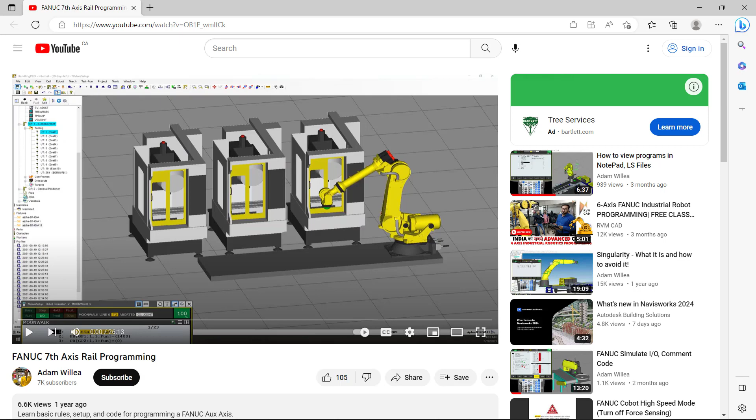In this video, I'm going to show you how to configure an extended axis in RoboGuide. There is an excellent video from Adam Willea on YouTube that explains how to configure a 7th axis on a rail. In this video, I'm going to do a similar configuration, but in a slightly different way.

We're going to start by creating a new project on RoboGuide. We're going to start from scratch. So if we're going to create a new cell, we can select new cell from this screen, or we can go to File on the menu and select new cell, or select View and Navigator. When we open the process navigator, we just select start a new cell.

And the wizard is going to pop up. On the wizard, because we started from RoboGuide, I'm going to select HandlingPRO. I'm going to select next. It's going to show the name; the default is HandlingPRO1. We're going to go with that. Select next. Here, from these options, we are going to select create a new robot with the default HandlingPRO configuration.

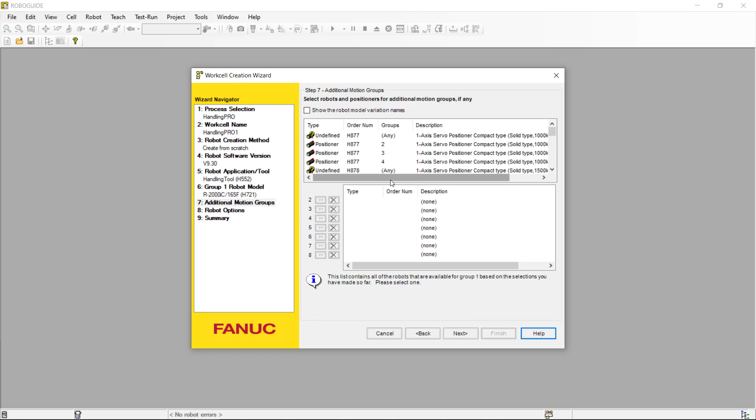We select next. In here, I have the versions already installed for RoboGuide 9.4 and 9.3. I'm going to select version 9.3. I select next. This option is asking for the end-of-arm tooling. I'm not going to select any end-of-arm tooling for the moment. I select next. And on this screen, the default is the robot R-2000iC/165F. I select next. On this screen it's asking for the motion groups. I'm not going to do any selection. I just press next.

And in here, we're going to select the options. To look for the options, we can just click on the search field and type the options that we want. I'm going to type constant path, and I'm going to select the option R663. And next, we are going to select extended axis control. That is option J518. We press next. Here is showing a summary of the configuration, and we just press finish.

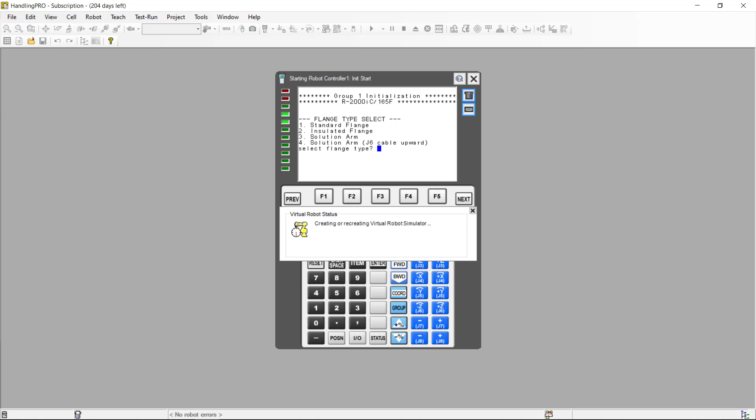What's going to happen next? RoboGuide is going to start creating the configuration for the work cell. This is going to take some time, so I'm going to pause the video, and I'm going to come back when it's asking for the next option. Okay, here RoboGuide is asking for the flange type. We can close this pop-up window that is showing here, and we're going to go with option number 1, that is standard flange. Select 1 and press enter. And I'm going to pause the video again until the work cell is finished.

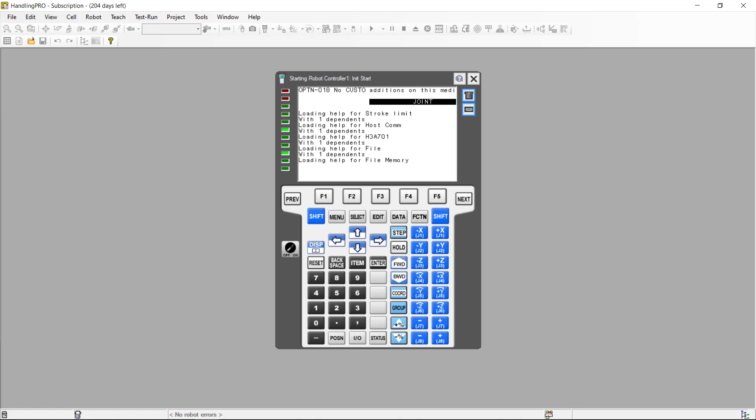At this point, RoboGuide has finished creating the configuration for the work cell. We have the robot in the work cell, and to summarize what we have done so far, we just created a new work cell from scratch, and we added the options for constant path and for extended axis control. What we need to do next is to configure the extended axis. We're going to select Robot from the menu bar, and from the drop-down menu, we're going to select start controller and controlled start.

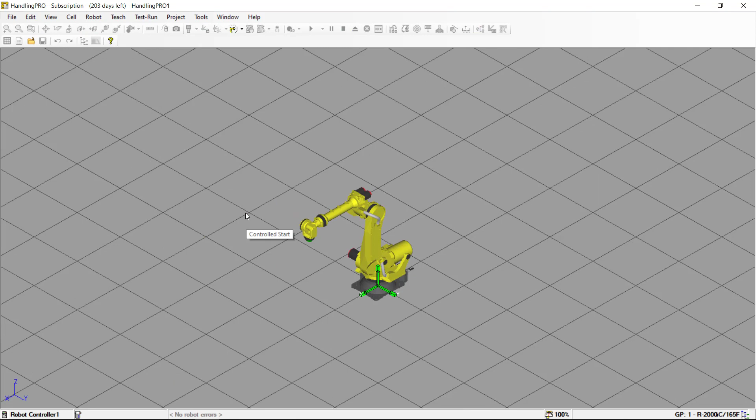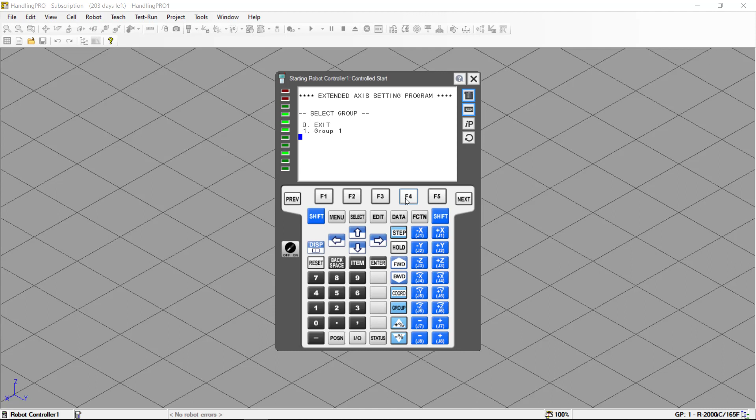Notice that the teach pendant is going to pop up. From here, we're going to select menu and option number 9, that is maintenance. You're going to notice here that on the right of the robot it is showing 0, meaning that the extended axis hasn't been configured yet. We're going to select extended axis control by pressing the down arrow key, and we're going to press F4 for manual configuration. We're going to select option number 1 for group 1, enter. By default it is showing axis number 7, so we're going to select axis number 7 for the extended axis, enter.

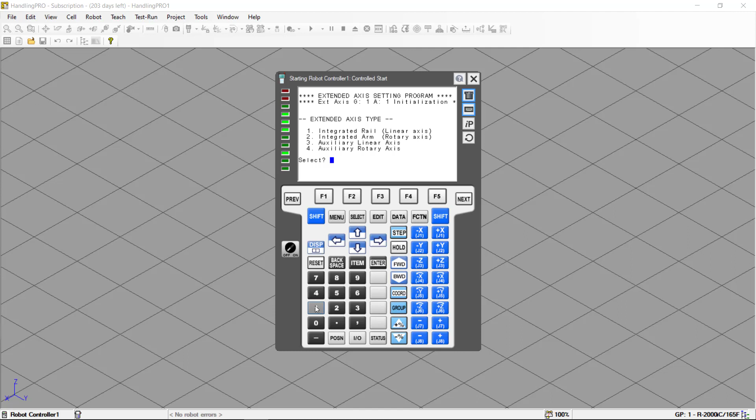Here we're going to select option number 2, add extended axis, and here it's asking how many axes we're going to add. We're going to select 1 and enter. Here we're going to select option number 2, enhanced method. For motor size, option number 64, enter. Motor type is going to be option number 2, enter. Here we're going to select option number 1, integrated rail, linear axis, enter. We're going to select option number 1 for the direction on the x-axis, enter. Gear ratio, we're going to select 120, enter.

The maximum joint speed, we're going to select option number 2, no change, enter. The motor direction, option number 2, false, enter. The upper limit, we're going to select 5,000, enter. For the lower limit, minus 5,000, enter. The master position, we're going to select 0, enter. For acceleration time 1, we're going to select option number 2, no change, enter. For acceleration time 2, again option number 2, no change, enter. For the default minimum acceleration, option number 2, no change.

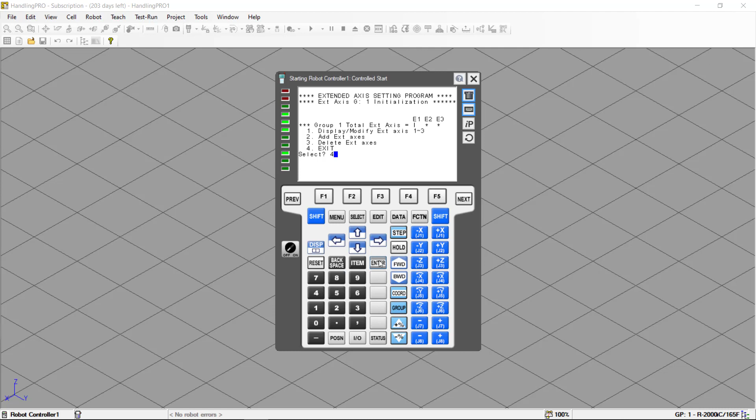And now we're going to select option number 4 to exit the settings. You're going to notice now that on the right, where we had before 0, now it's showing 1, meaning that the extended axis has been configured. Now we can select the function key, and we're going to go with option number 1, that is called start, enter.

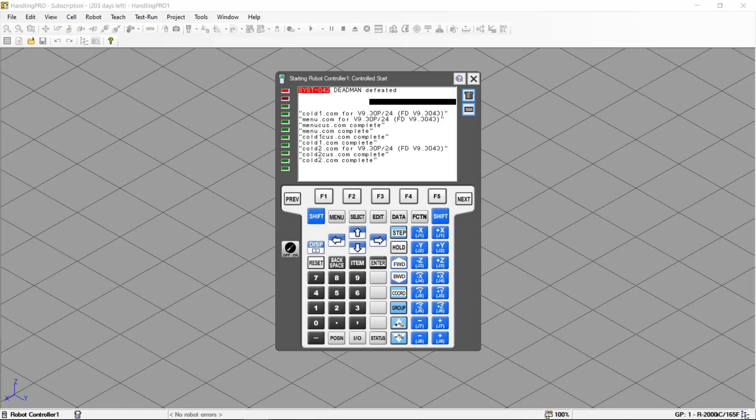We're back on the work cell. I'm going to save the changes. And notice that even though we have configured the extended axis, nothing has changed in the work cell. That's because we haven't defined yet any machine that uses extended axis. So the next step is going to be adding a machine.

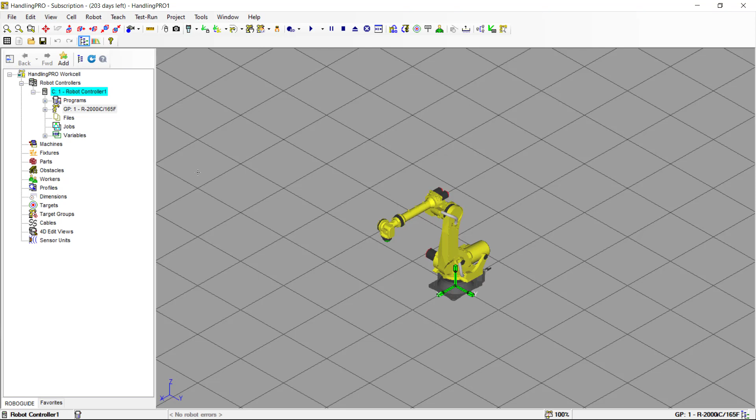We're going to select machines from the tree, right click, we're going to select add machine, and we're going to select box. Notice that it's adding a box on top of the robot, and at the same time there is a property window for the machine. By default, the name is machine 1. We're going to change that to rail.

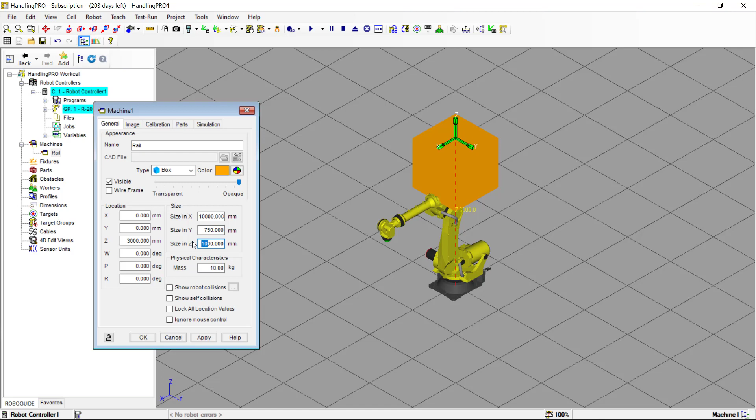I'm going to apply, and I'm going to change the size of the box. For the X, I'm going to change it to 10,000 millimeters. For the Y, I'm going to change it to 750 millimeters. And for the Z, I'm going to change it to 300 millimeters. I'm going to apply the changes, and notice now that the rail has changed in size.

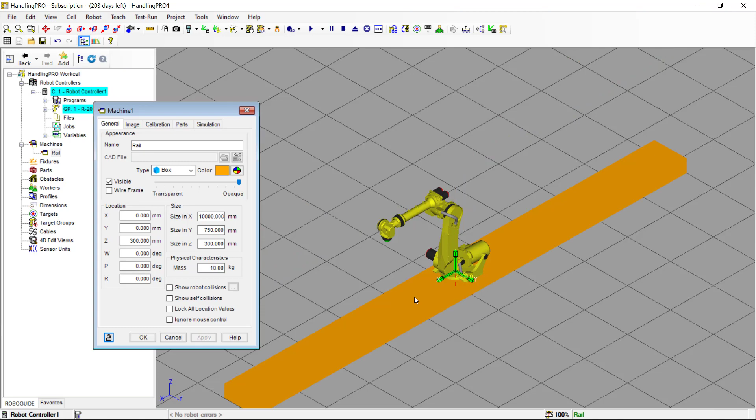And the other thing I'm going to do, I'm going to move it to 300 millimeters in the Z direction. When I apply the changes, you can see now that the rail has moved to the floor, but still the robot is overlapping the rail. I'm not going to make any changes yet for that. What I'm going to do, I'm going to change the opacity for the rail, and I'm going to apply the changes, and I'm going to close this window for now.

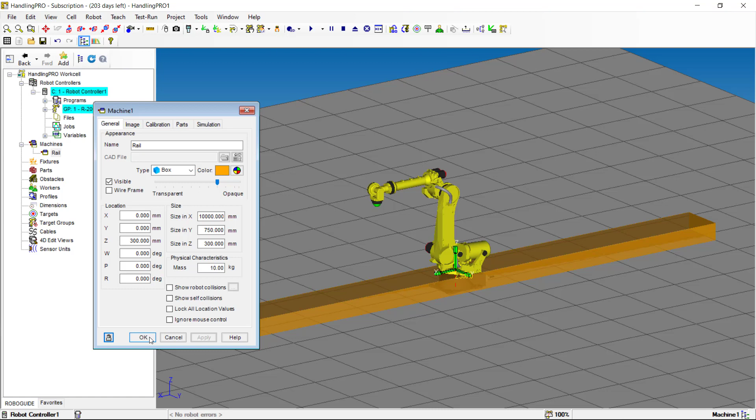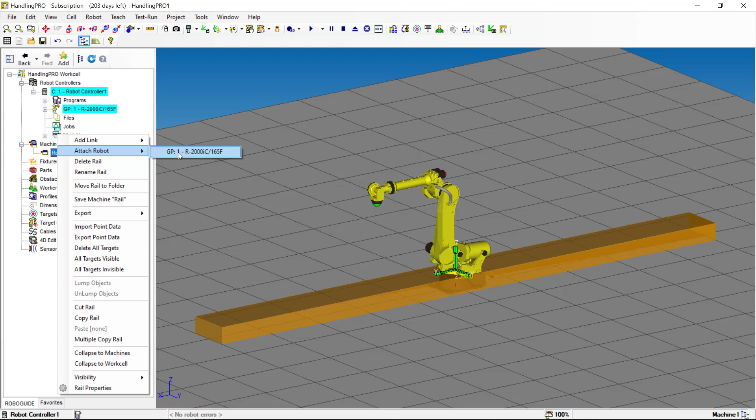What we need to do next is select the rail, right click, and attach the robot. When we select attach robot, the only option that we have is the only robot that we have on the controller, that is in group 1. We're going to select this robot. And notice now that the robot has moved on top of the rail, and we have a new pop-up window for the link. At the same time, the link is showing as a child of the rail with a servo motor as an icon.

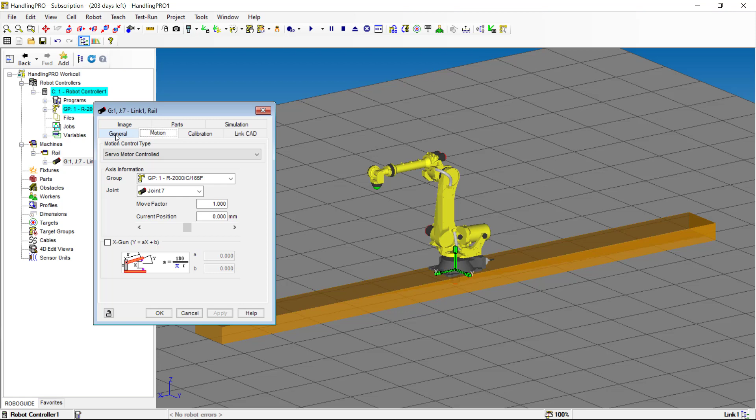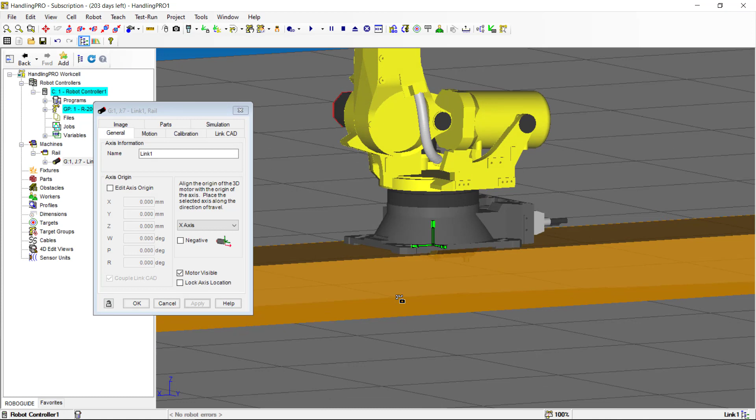From here, we are going to select General, and you can see that the servo motor is showing underneath the rail. If you cannot see it, you need to change the opacity for the rail. And the orientation of the servo is on the Z direction. We're going to change that by going back to the properties for the link. I'm going to select the General tab, and on this option for the Z axis, I'm going to change it to the X axis, and I'm going to apply the changes. So now the servo has moved from the Z axis to the X axis orientation.

I'm going to select the motion tab, and you can see that here we have servo motor controlled, and for the axis information, on group we have group 1, and for the joint it is joint number 7. The current position right now is showing the robot on the center of the rail, and we can use this sliding bar to jog the robot.

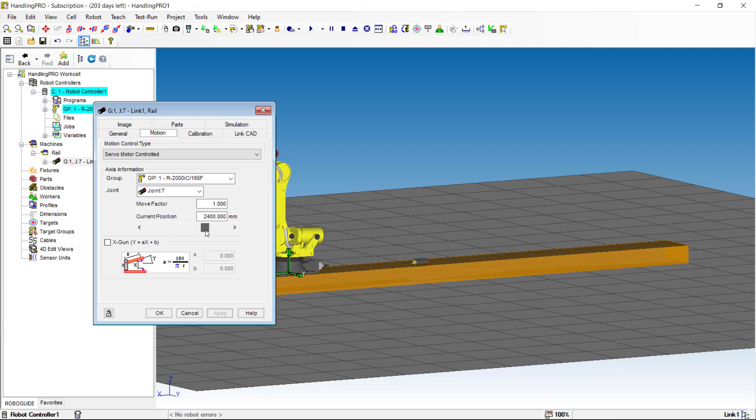So if I move the sliding bar to the right, I'm jogging in the positive direction, and if I move the sliding bar to the left, I'm jogging in the minus direction. I can go to minus 5,000, or I can go to plus 5,000. When I close this window, we're going to save the changes. And now I can show you one more thing.

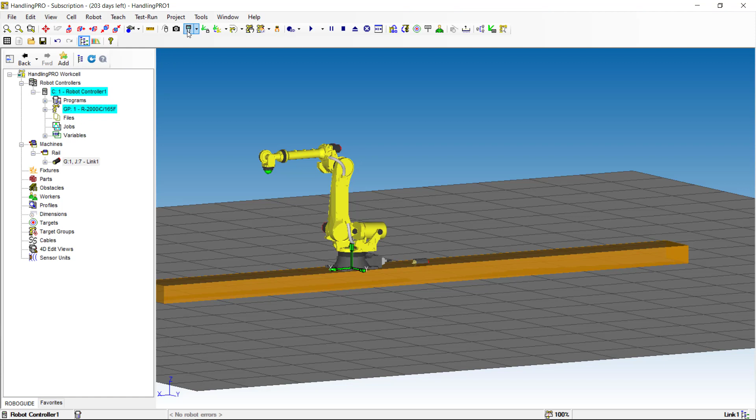If we open the teach pendant, I can jog the robot from the teach pendant. We're going to select Shift, and I'm going to change the speed from 100% to 50%, and I'm going to press J7 plus, and the robot is going to move in the positive direction on the rail. And if I press minus J7, it's going to move in the negative direction.

Notice here that I'm using joint for jogging. If I select group and I change that to group 1 S joint, S is the meaning for the supplementary axis. Now I can jog it again, but this time what I'm going to use is the supplementary axis number 1 for joint number 7. So if I press J1 in the positive direction, it's still jogging forward, and if I jog it in minus J1, I'm moving in the reverse direction.

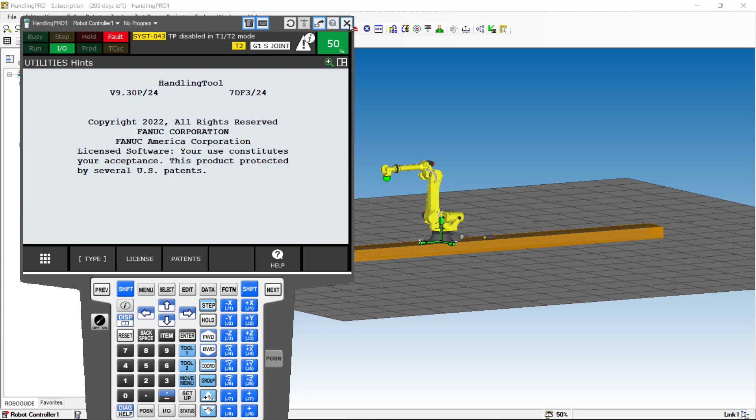Last but not least, we're going to create a simulation program. There are a few ways we can do that. We can expand the robot controller, and here on programs, right-click and add a simulation program. Another option is to select view from the menu bar and open the process navigator. From the process navigator, we select teach programs and add a simulation program.

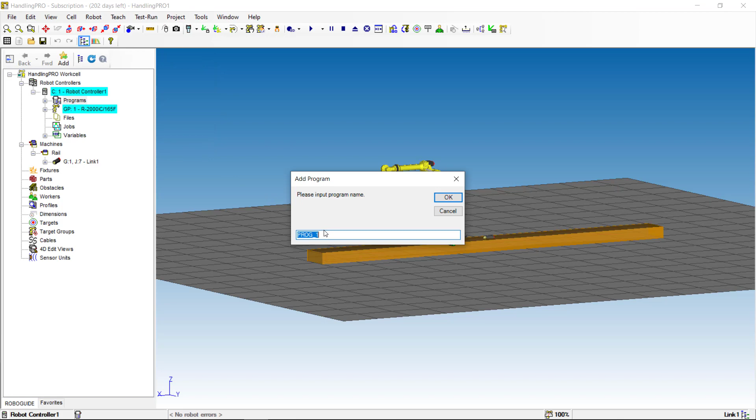There is still another option. We can select teach from the menu bar and select add a simulation program. By default, it's going to call it program 1. We select OK, and the program is going to be added on the tree. At the same time, it opens the simulation program editor.

And you can notice here, if we select the teach tool, the triad is going to show on the tooling, and at the same time, the position of the robot with the coordinates shows on the bottom line. We're going to select joint, and we're going to move the robot on E1. It's going to be the extended axis. We're going to put it in position 0. We're going to record this position. You're going to notice that we're going to make a linear move at 2000 millimeters per second, and fine.

Now we're going to change this one to Cartesian, and I'm going to move the x-axis 500 millimeters. I'm going to record this position, and we're going to create more movements. We're going to move the extended axis 500 millimeters. I'm going to record the position. We're going to move the x-axis another 500 millimeters. I'm going to record the position, and we're going to keep doing that.

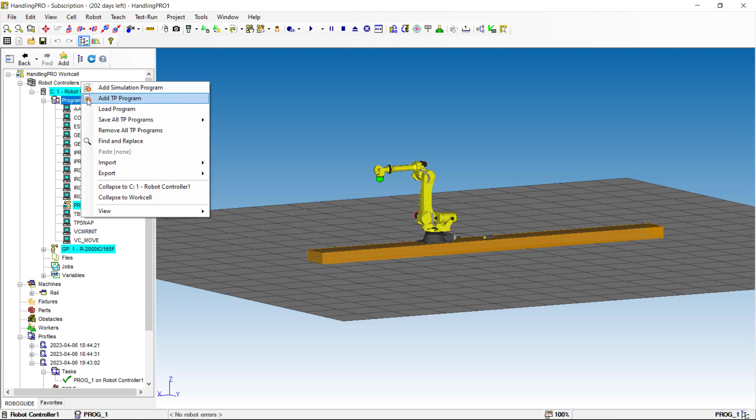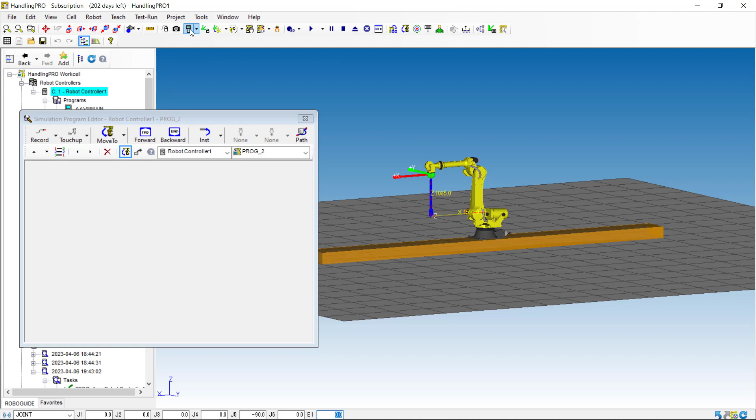Now we're going to create another simulation program, and this time we're going to use position registers. Start by putting the robot in position 0 again. We're going to select joint, and I'm going to move it to position 0 on the extended axis. We're going to open the teach pendant, and we're going to go to the position registers. We're going to select position register 1. We're going to clear the data. And we're going to go again to position, and I'm going to put the data to 0.

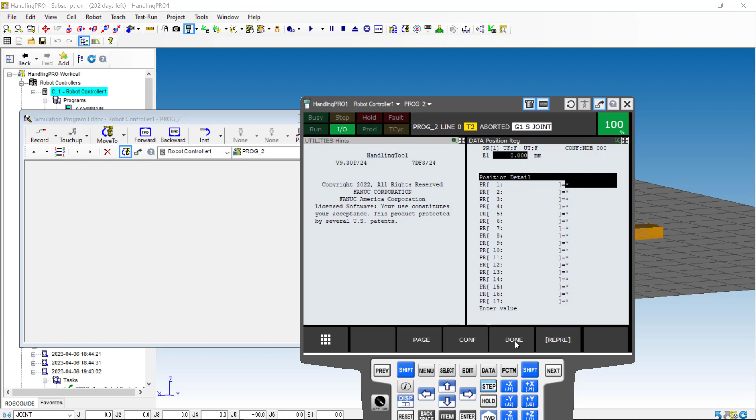Notice now that we have a button for a page. If we select page, we go to the second page, and this is going to be 0 for the extended axis, and we're going to press done. Now we go back to the simulation editor, and we're going to start adding instructions. You notice here, if I select instructions, there is a drop-down list with all the instructions that we can add in the simulation. If we want to add any instruction that is part of the teach pendant but is not in the list, we select the remark, and besides the exclamation mark, we add a question mark.

Now we're going to select position register 1, element 1. We're going to initialize the data to 0, and we're going to do the same for element 7. Position register 1, element 7 equal to 0. We're going to add a remark, and we're going to record the position. Now we are going to add a for loop. We're going to go from 1 to 5. I'm going to close the for loop, and here we're going to add a new instruction that is going to be an increment for the position register.

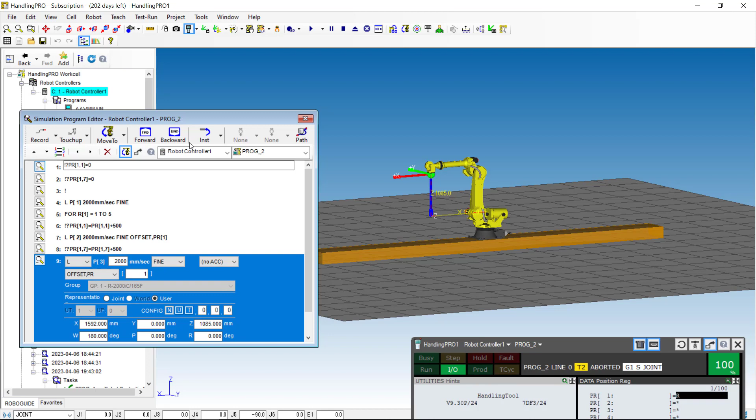Now we can simulate. We can run the simulation and see what happens. You notice that the robot starts moving using the position registers and the for loop. We do that again.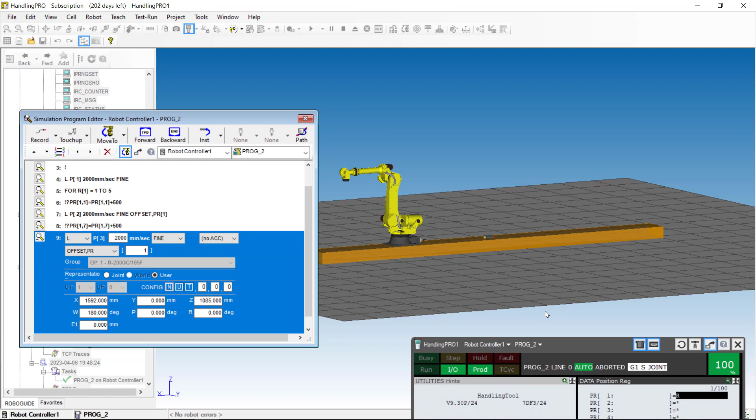You're going to see that if we go back to the teach pendant, we press the select button. We're going to do that here, select the button, and we open program number 2. We can see all the instructions that we added on the simulation program.

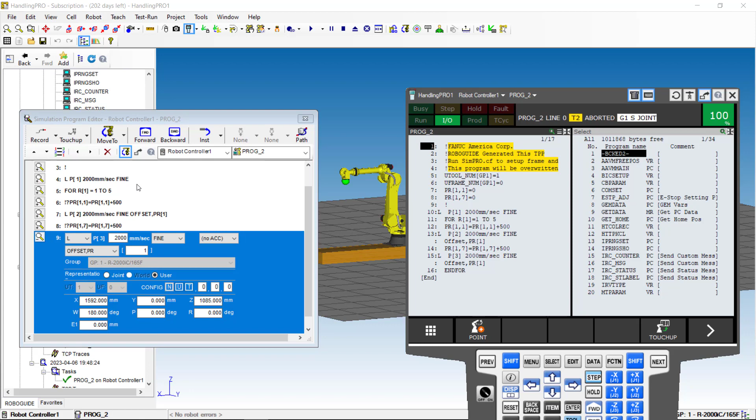Just to summarize, we have created a program from scratch. We added a selection for constant path and extended axis. We configured the extended axis. We added a machine, and we added a link to the robot. And finally, we created a couple of simulation programs to test the movement of the robot.